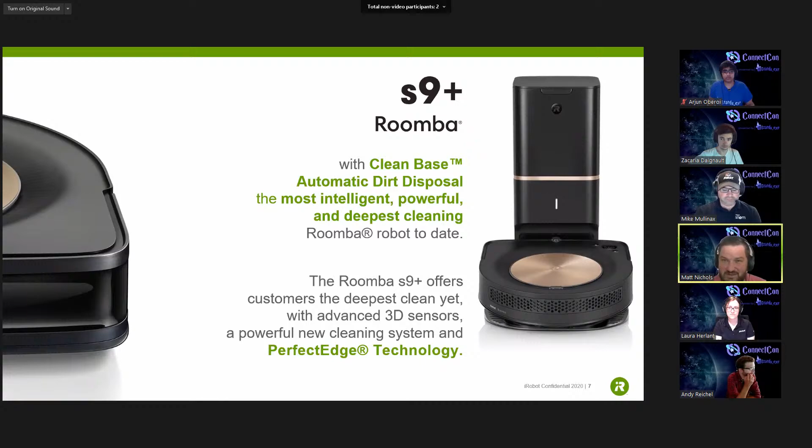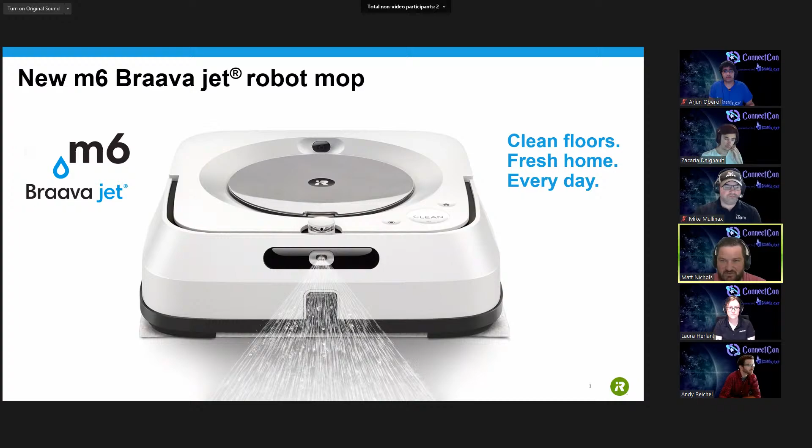This one is unique - this is our latest one, the Braava jet, the M6, because it has systemic navigation. So you can see we do have a camera on this one as well, just like the S9 and the i7, some of our other vacuums. The camera really just helps it navigate around your home and know exactly where it is.

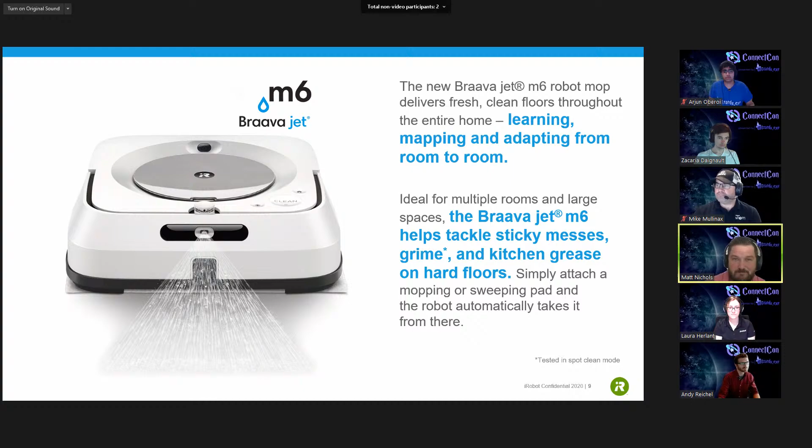So our goal is that we're working on all these different technologies so we can help automate your home and really create an ecosystem of robots to make your smart home better. Because iRobot has this unique capability where we know where things are in your house. If you think about Alexas or Nest thermostats or anything like that, none of those things move around. So we're really one of the only, if not the only, smart device that is moving around and knows where it is within your home.

The other thing that we do is called teaming. All of our connected robots are connected through the cloud and then into your app as well, and that enables them all to talk together. So for example...

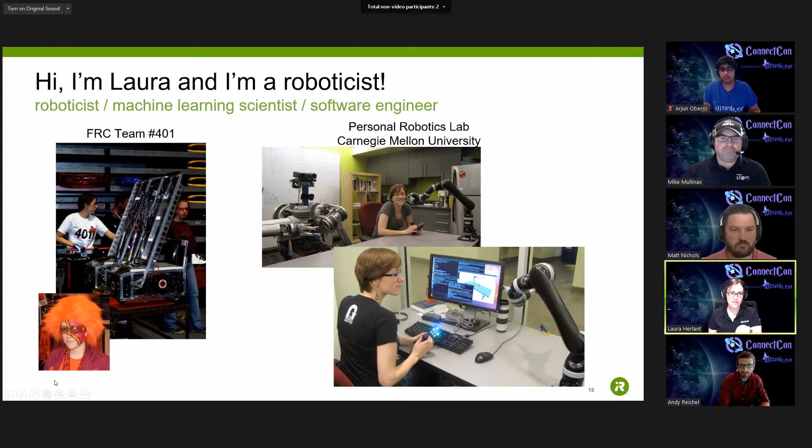So these switch slides—I'm on the machine learning group at iRobot, and this is something we haven't advertised too much yet, but iRobot does a lot of work on artificial intelligence and machine learning, trying to make our robots smarter and more well adapted to particular people's homes. There are lots of different types of machine learning, you'll see this also outside of machine learning, but also in data science, so it's just sort of different spectrums where you are.

Supervised learning does a lot of figuring out what things are in images, or predicting if an event is going to happen or not. Unsupervised learning is about figuring out the hidden structure in the data, so a lot of data scientists work on this. And then there's a kind of new field, reinforcement learning, where you're trying to learn behaviors.

So I do a lot of work along the whole spectrum, but most of what I do is sort of on this last piece of the puzzle. And so it's really all about working with a team.

I work with a team on reinforcement learning, there's a team for around each of these. One of the things I thought when I got into robotics was that I was going to build a robot - come up with the design, manufacture it, build the parts, program it, all the way end to end. But you discover very quickly that robots are really complicated, and you need to know the details of each different part if you're going to do that.

So it's really about working with my teammates - I can deliver one part, but other people are going to deliver other parts, and they all come together to make a robot. That's been the biggest thing I've gotten out of this process so far - learning how to work with others and plan with others around delivering a really complicated but successful robot.

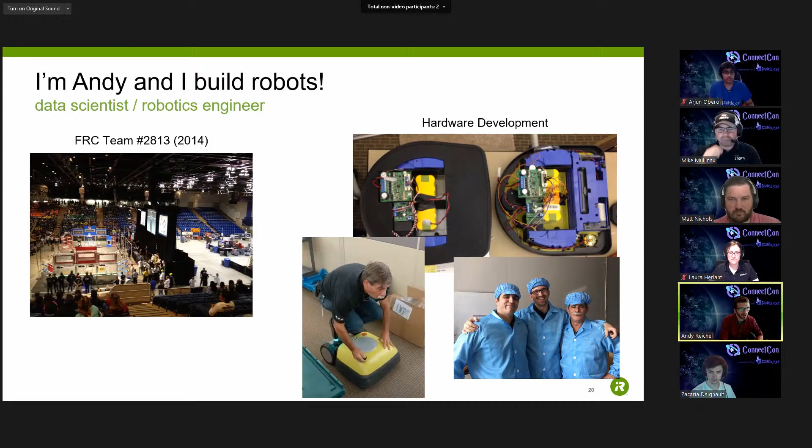The bottom right picture is of myself, Scott, and another mechanical engineer working in China, where a lot of the designs come to fruition. I think we'll talk more about that in some of Matt's slides.

Thanks, Andy. So I'm Mike. I've been with iRobot for about 5 years now. I started in FRC back in 2003 as a student, and I kind of never lost the robotics bug from then on. I didn't know how to get involved in that, and my path took more of a winding route to get here.

I originally studied mechanical engineering in school, so I still apply that in my personal life where I build combat robots - I compete in various different weight classes for that.

But in my professional life, I work on our customer care team, and I work with a lot of the data we get from customers calling in and reporting issues or giving feedback, then presenting that to our engineering and quality teams as we're designing new products.

As we launch a new product, we get that feedback from our users directly back into the product to help improve it and make sure that every robot we release is better than the last one, and really meets the needs of our customer.

As far as how I ended up at iRobot, after school I actually went down more of the IT route. I worked for a couple of different places as an admin, then I worked for Apple for a little while. After I left Apple, I came to iRobot, working on our customer care team, working with the launch of iRobot's first connected product, and really bringing some of that IT knowledge into a space where we didn't have it before, since previously all of our robots had been something you walked over to and pressed the button.

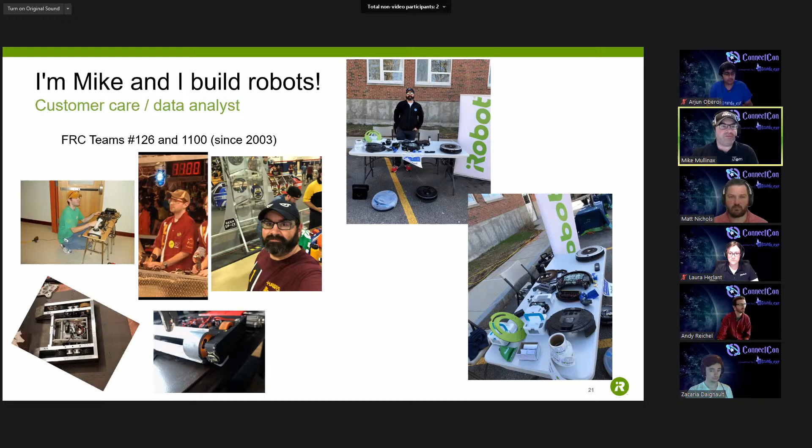Oh, that's slightly messy. That's fine. My name is Zac, and thank you, Mike, for handing it off to me.

So what I do at iRobot is I break robots, which seems counterintuitive, but a lot of the engineering process is seeing where your limitations are and how the product actually reacts under certain conditions.

I specialize in automating a lot of tests, and these choppy GIFs are a little bit of a representation of that. I'll program an industrial arm to go through and do a bunch of repetitive motion tests as one aspect of my job, to try to test the limits and see where things start breaking down, so that I can bring that data back to our mechanical engineers, so they can say, well, we don't want it to break down after it hits the wall once. That doesn't make a good product. So maybe we'll beef this up a little bit right here, or something of that nature.

I got into doing this by originally falling in love with robots and engineering in FIRST. Back in 2007, I was on Team 809, and then Team 571 in Central Connecticut. I had a fantastic time doing all the different games in FRC.

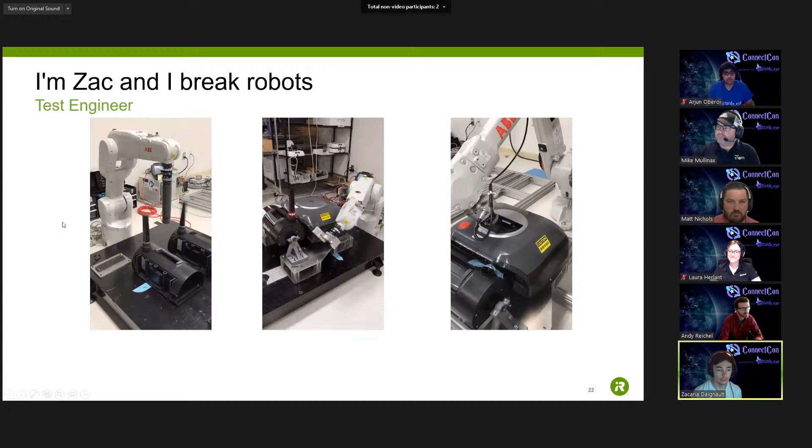Cool, thanks Zac. So, maybe doing this a little bit backwards, but my name is Matt, and I am actually in our operations and supply chain group at iRobot.

Before I talk about work, I was also involved in FIRST in high school, which unfortunately is a long time ago now. I was on Team 40, which was Trinity High School up in Manchester, New Hampshire.

Tons of great memories there. And I just always remember, and I think this is what still keeps me motivated today, but I was just always in awe of what we were able to do, using the technology and tools we had available to us. And then you bring together a whole bunch of people and you have a good team. It's just crazy that we could do that. And in high school, it was maybe even more, because who knew that you could make a robot that went and, I don't know, when I did it, we had to hang off of a bar and all kinds of crazy stuff, but really cool.

So I am an ME. I went to WPI for mechanical engineering, and right out of school I worked for Gillette, the razor blade company, in their manufacturing operation in Boston. And again, really neat. The speed that those razors are made is an unbelievable thing.

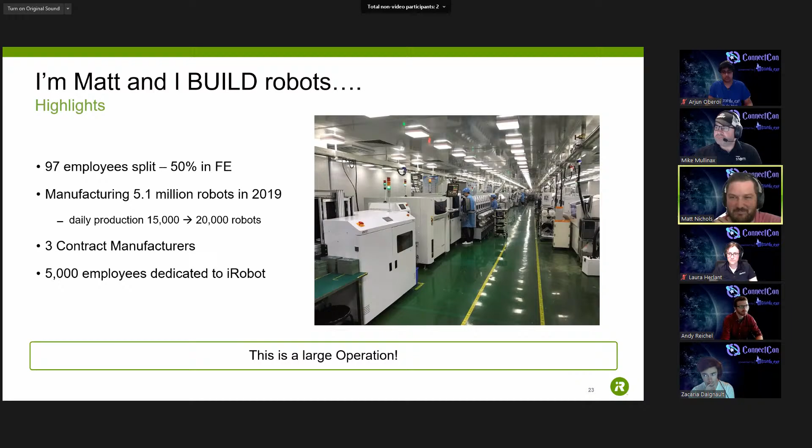Last year we made over 5 million robots. That's anywhere between 15,000 and 20,000 a day. And if you think of the number of parts it takes to make a Roomba, I think it's up over 1,200 or 1,400, and then making 15,000 of those a day, you're just talking crazy numbers. We've got 3 different factories that make all those robots, and this is another staggering number, but that means in the Far East, in Asia, we have over 5,000 employees on any given day working on building robots. So really cool stuff.

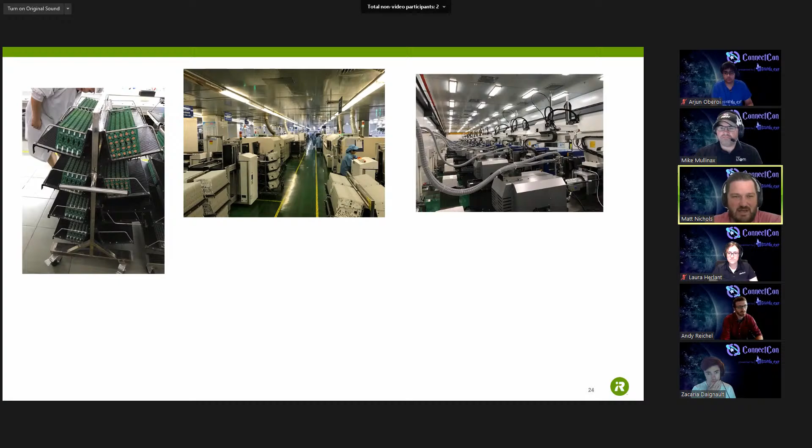And then just a couple pictures, just to show a little bit of the scale. That's a huge rack of printed circuit boards that are going into a robot. That's a picture of the surface mount line that actually assembles the circuit boards. Over here, that's a picture of a whole row of plastic injection molding machines, and another row of that.

And then here's a picture similar to what Zach was just sharing. Our factories are very highly automated now, and there's a term we use at iRobot that's kind of catchy: robots making robots. So there's a picture where you can see we've got a completely automated operation for assembling, in this case, a Roomba.

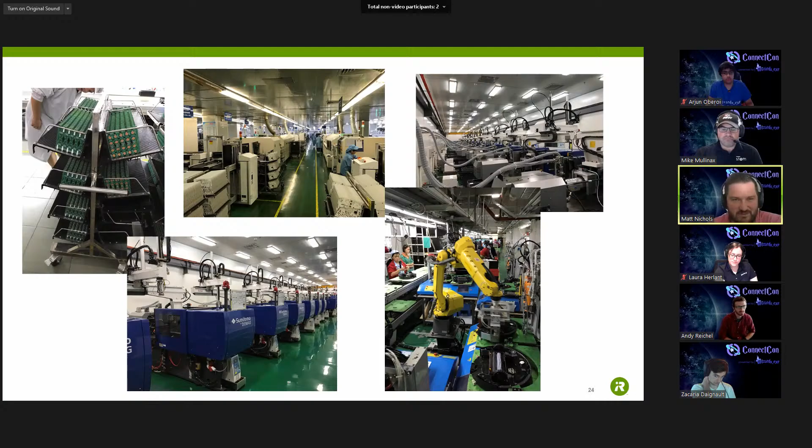And then this is just some, again, cool pictures, one of those moments for me personally when it was really exciting to work at iRobot. This is a picture of one of the tools that we use, and actually Zac and Andy all know this, we were on the same team together. If you look at the size, the picture on the left is a normal sized human, and that's the tool we use to make one of our products. Just absolutely massive. And then the middle picture is us lifting it into the press, and then it's in there. So just to give an idea of some of the stuff that's involved to make a robot.

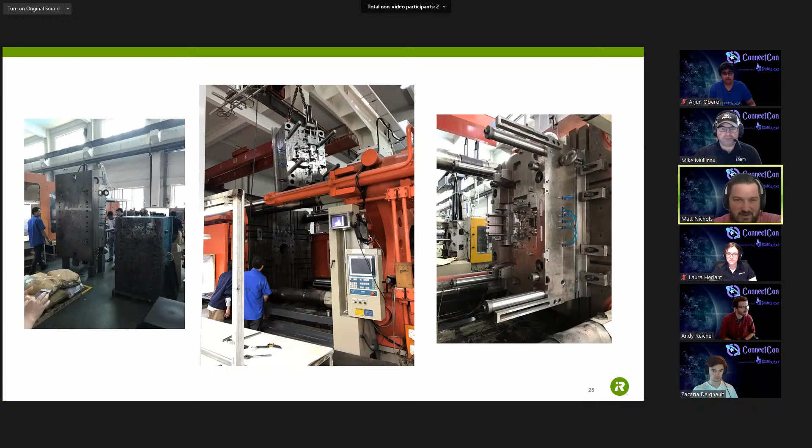So that's me. And I'll leave you with a key takeaway here: there are all different types of skills that we have at iRobot, and every single person and their strengths or talents are needed in order to make sure that we make all the robots that we do and work on all the cool stuff that we do. So with that, I'll turn it back over to Arjun.